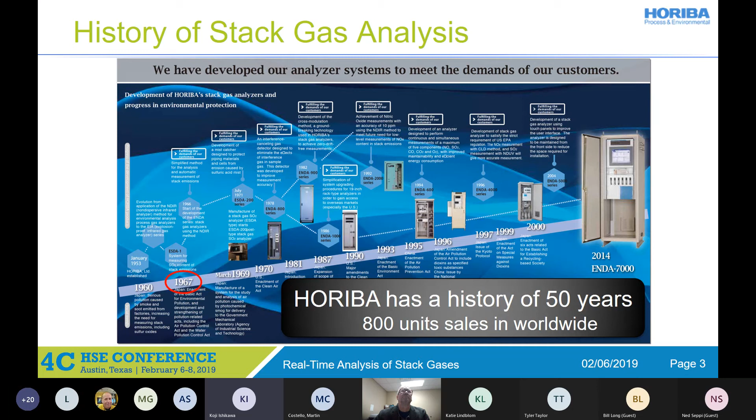Before I explain the technology, I'll introduce our history of stack gas analyzers. Horiba started to sell stack gas analyzers in 1967, so Horiba has a long history, almost 50 years. We have developed our analyzer systems to meet customer requirements. Currently, we ship almost 800 stack gas analyzer units per year worldwide.

Our stack gas analyzer type name is ENDA, E-N-D-A. The features of the ENDA series are online and real-time, long-term stability, and high sensitivity. From these features, we provide it as a continuous emission monitoring system, CEMS, to customers. Main applications are electrical power plants and waste incinerators, for monitoring the concentration of exhaust gas to ambient, and for controlling plant burning and reagent injection.

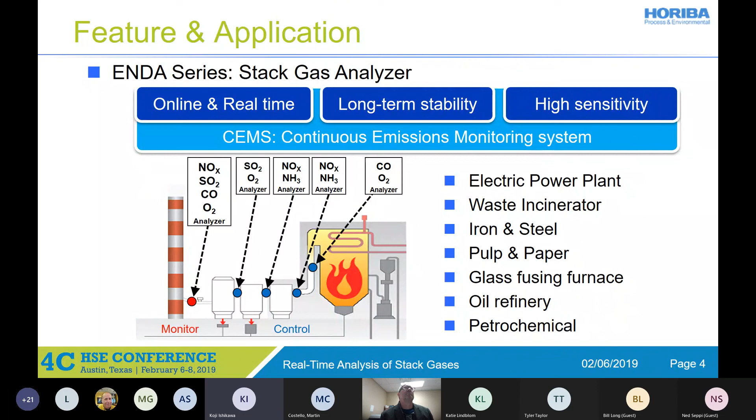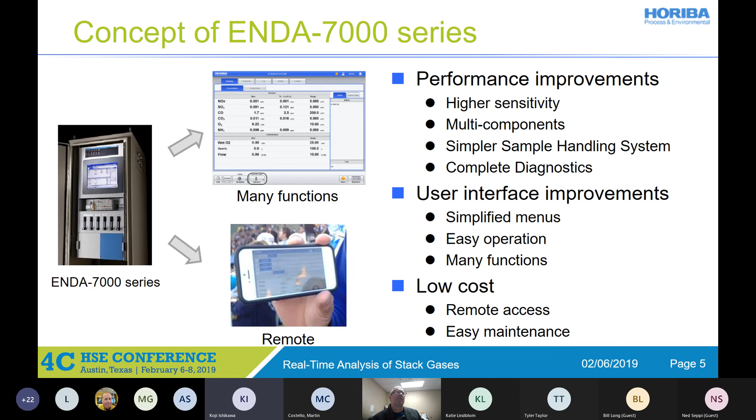This slide explains the product concept of the ENDA-7000. The 7000 series is the latest product for the US market. The first concept is performance improvement; I will explain in detail later. The second one is user interface improvement. The 7000 has a big 15-inch screen and simplified menus. And it can be remote controlled. You can check the status and operate remotely, using a phone or tablet.

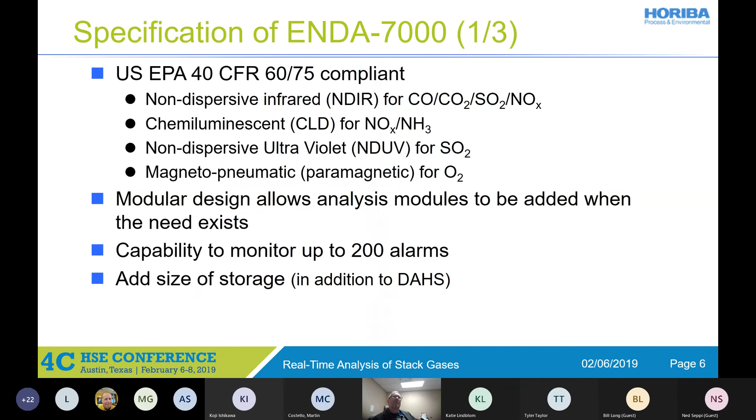In the next 3 slides, I will explain the 7000 specifications. This first page is the functional specification: the 7000 is US EPA 40 CFR Part 60 and 75 compliant, and analyzer modules can be added when the customer needs them. This slide shows the performance specification. The 7000 can measure a 5 ppm range at minimum, and a total of 6 components in one case.

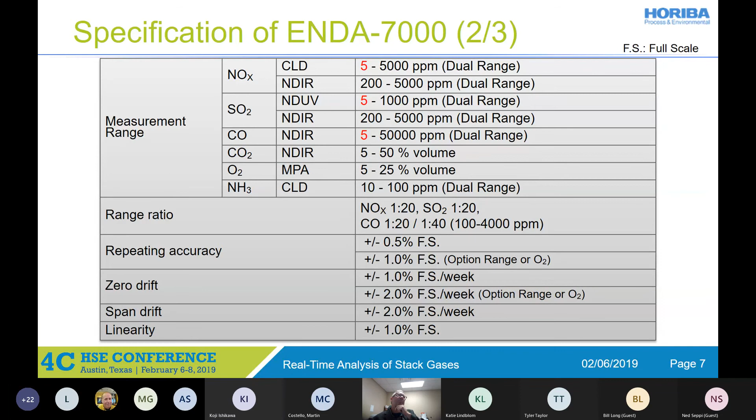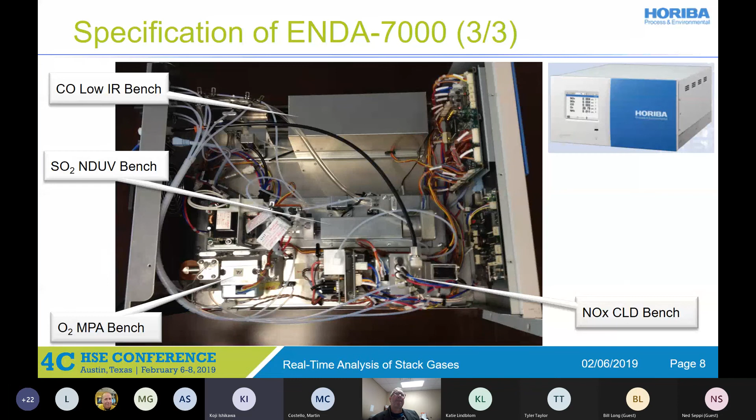This picture is the inside of the 19-inch rack analyzer. Each bench is designed in a compact size. We can make many combinations depending on customer requirements. It's easy to change and easy to combine.

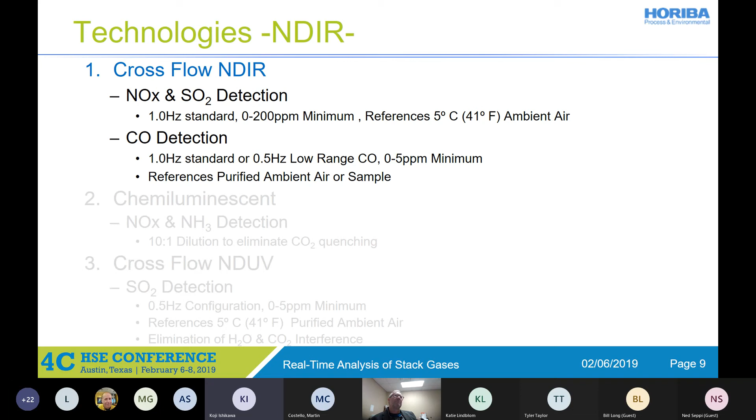From this slide, I will explain our 3 technologies. The first technology is cross-flow NDIR modulation. Its measurement components are NOx, SO2, and CO. Generally, in non-dispersive infrared, called NDIR, many components have a specific absorption spectrum in the infrared. And absorption intensity depends on concentration. So NDIR can measure the concentration from this spectrum and intensity. That is generally speaking.

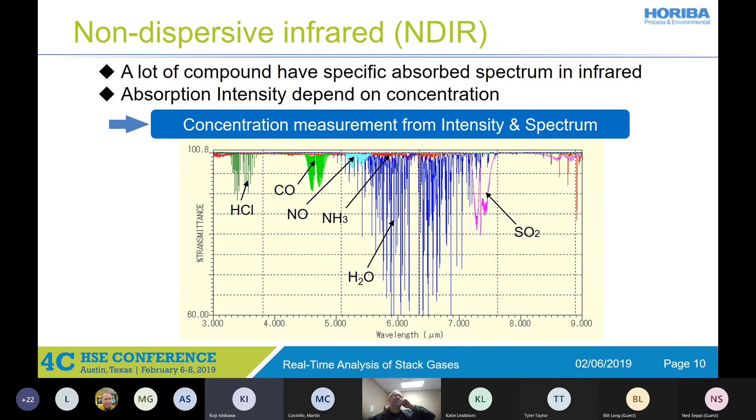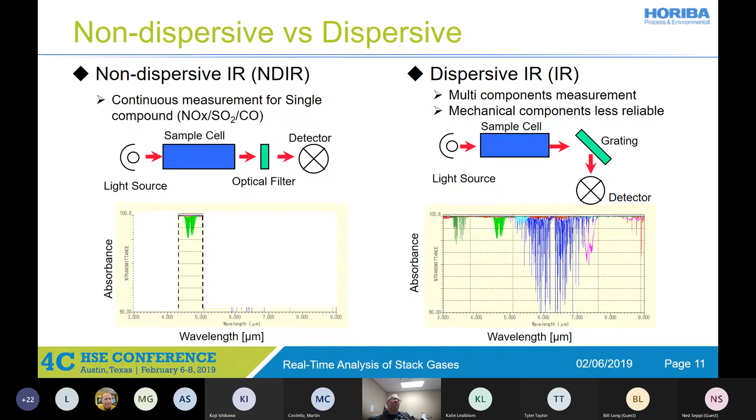Using NDIR, our featured technology is cross-flow modulation. The analyzer configuration is one light source, one measurement cell, a detector and a solenoid valve. The principle is switching the sample gas and the reference gas at 1 Hz. Then the IR signal is the difference of the IR absorption between sample and reference. The signal is just the absorption difference.

If we change the light source and detector, the base zero is stable. So it's not necessary to adjust the optical parts, the filter, or the light source. It's not necessary. And clean reference gas is injected into the sample cell every 1 second, so the cell is always kept clean. This is suitable to measure stack gas continuously.

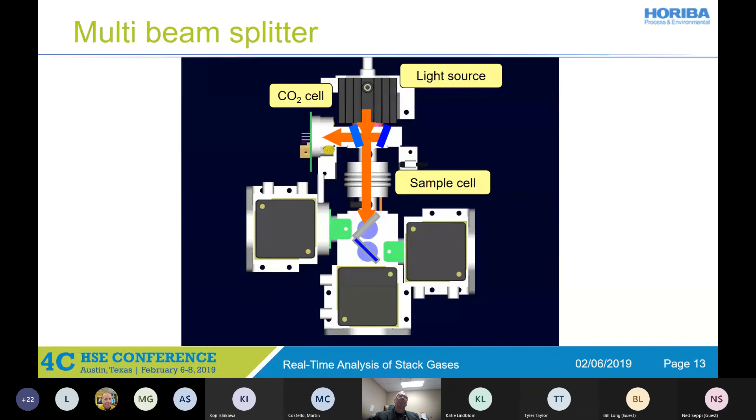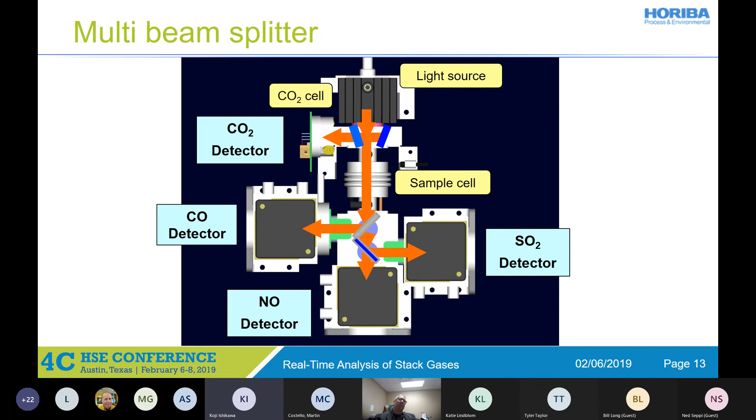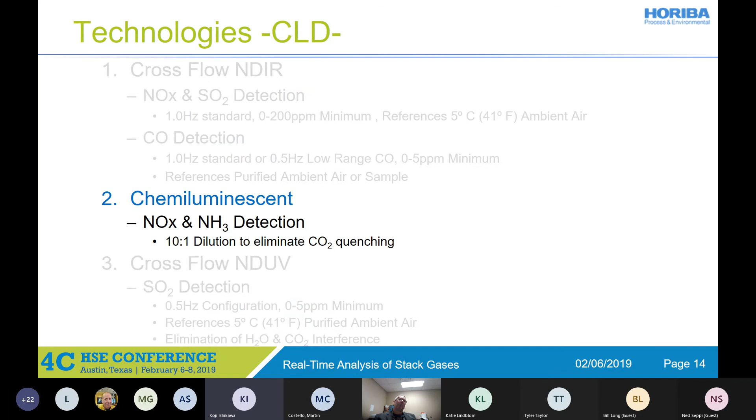Okay, the next, second technology is chemiluminescence. Measurement components are NOx and ammonia. First, I'll explain the principle. Nitric oxide, NO, reacts with ozone gas, then nitric oxide is oxidized and nitrogen dioxide is generated. A part of the generated nitrogen dioxide becomes excited. When nitrogen dioxide changes from the excited state to the ground state, it becomes luminous like this figure. This emission intensity is proportional to the nitric oxide concentration in the sample gas. So the detector measures the intensity to calculate the nitric oxide concentration.

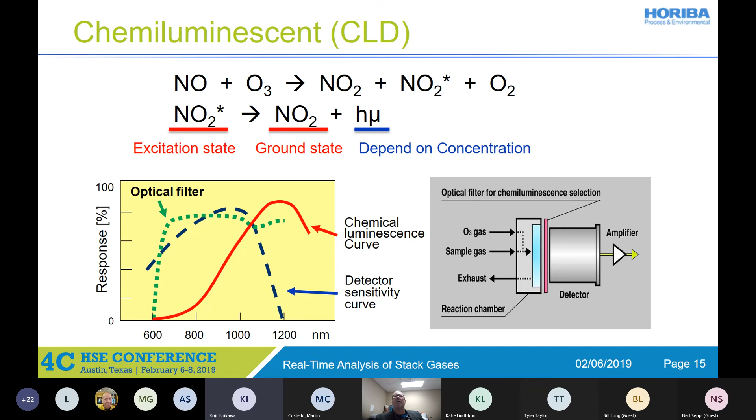This is the analyzer configuration. Our CLD analyzer's minimum measurement range is 5 ppm. We are using a vacuum pump. It's always kept at minus 9.8 kilopascal, almost 10 kilopascal. And we adjust the flow rate at every line: sample line, dilution line, and ozone line. The total flow rate is almost 1 liter per minute.

In burning exhaust gas, CO2 concentration is high and changes depending on the burning condition. CO2 has an effect of quenching the emission, so the emission intensity is reduced. So our analyzer has a dilution system with dry air, reducing the CO2 quenching. That means our CLD analyzer is stable with no interference in all gas conditions.

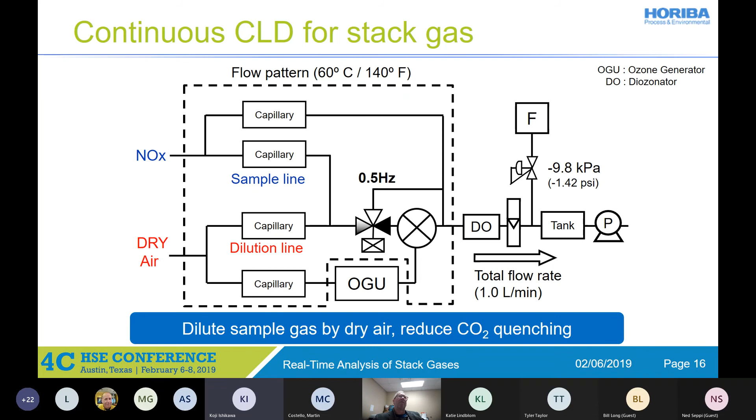And using a single CLD analyzer and sampling unit, we can measure NOx and ammonia. After the sample gas goes through the primary filter, it divides into the NOx line and ammonia line. Only the ammonia line has an oxidation catalyst. Ammonia is oxidized to NO, nitric oxide. After that, the solenoid valve in front of the analyzer switches the NOx line and ammonia line. The difference of the NOx concentration is the ammonia concentration, calculated in software continuously. That's the measurement of ammonia.

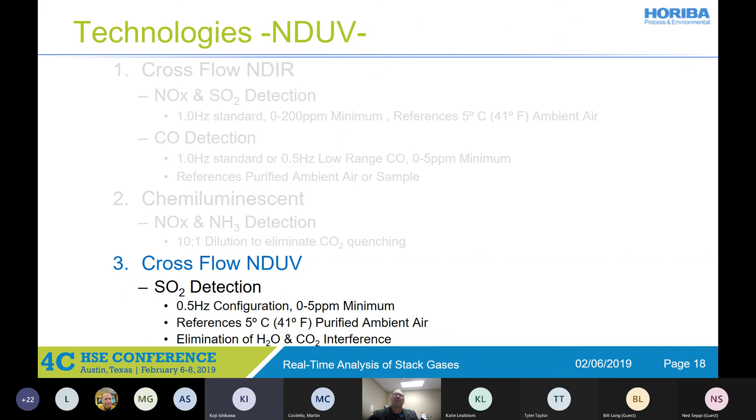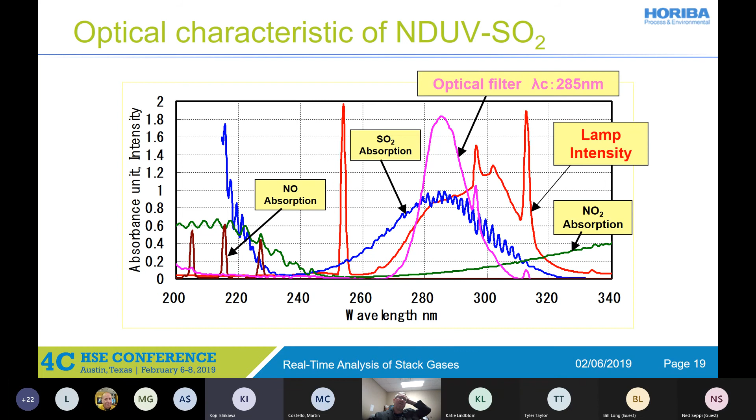The next technology is cross-flow NDUV modulation. The measurement component is SO2. First, I'll explain the optical characteristic. The light source is a special mercury lamp, in red, and the optical filter is in pink. It has a center wavelength of 285 nanometers. At this wavelength, NO2 also has absorption, shown in green. When the sample gas has a high concentration of NO2, we add a NOx converter in the sampling system in order to convert it to NO.

This is the NDUV analyzer configuration. This analyzer can measure SO2. The minimum measurement range is 5 ppm. The NDUV analyzer also has the cross-flow method I explained on the NDIR page. It's the same principle, switching sample gas and reference gas by solenoid valve. And in order to reduce the effect of water, a PPD tube is placed in front of the cell. Its purpose is to reduce the effect of water.

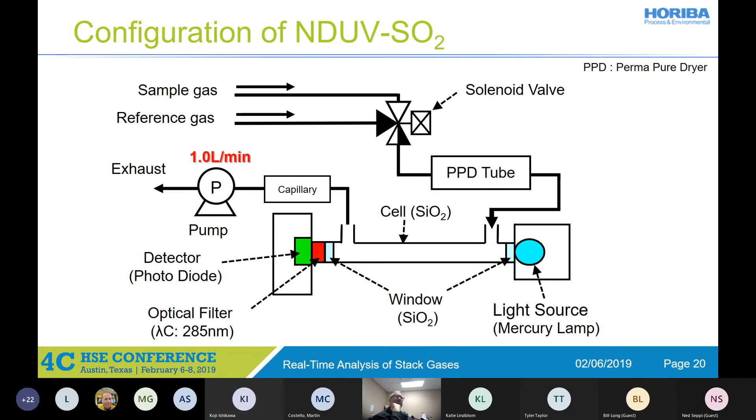Okay, in the next slide, I show the performance results for stack gas. For a stack gas analyzer it is important to measure continuously. The keywords are stability and sensitivity. About stability, our technology has cross-flow modulation, which I already explained. Next, a low sample flow rate, which improves the sample components life. And we make every key part in our own facility, our factory. HORIBA Japan makes all key parts.

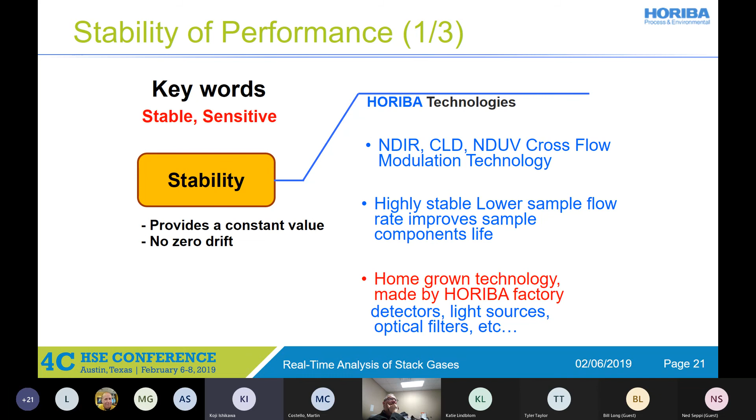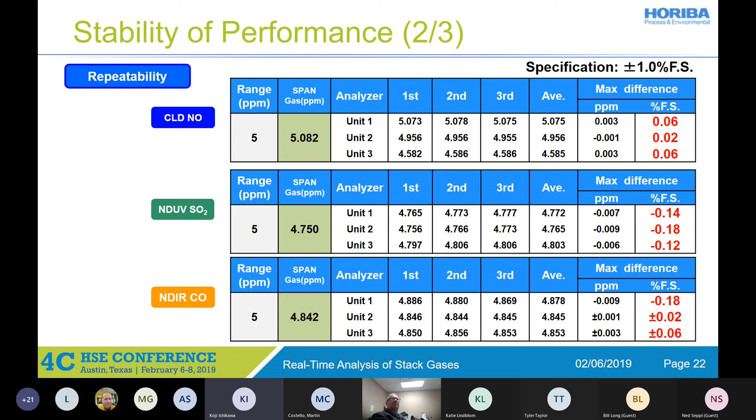This table shows the repeatability results. Every analyzer has a performance within plus or minus 0.2% full scale for NOx, SO2, and CO. The measurement range is 5 ppm for each. And this is the zero drift result, showing the weekly drift. The average of 3 units for CLD, bottom left, is plus or minus 0.7% full scale. NDUV, upper right, is plus or minus 0.3% full scale. CO is plus or minus 0.2% full scale. So every analyzer showed good stability results.

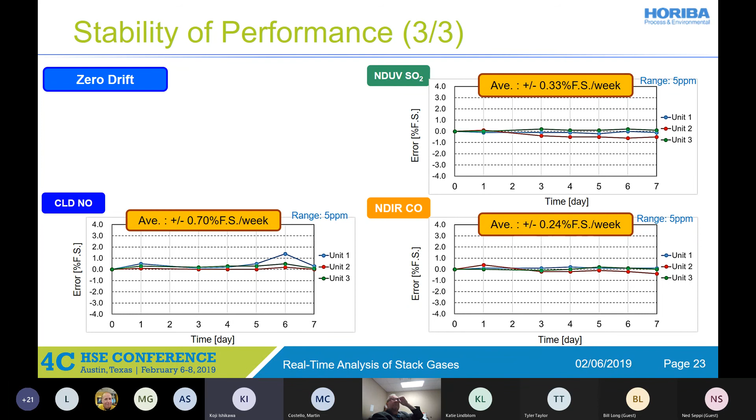So next keyword, what is the sensitivity? So that is the same as ambient analyzer in stack gas measurement. We modify ambient monitoring technology and eliminate interference effect to achieve the sensitivity.

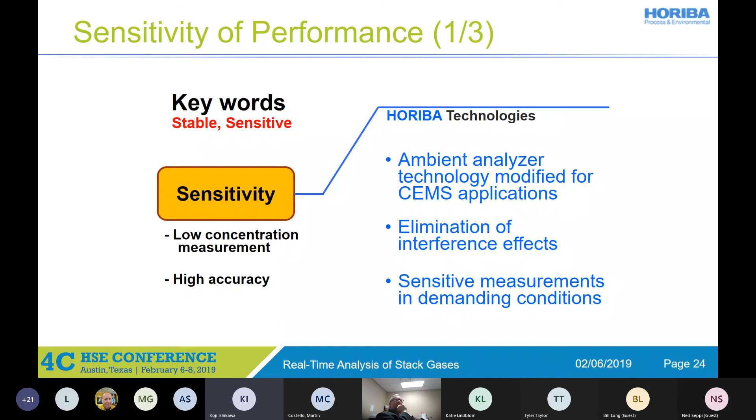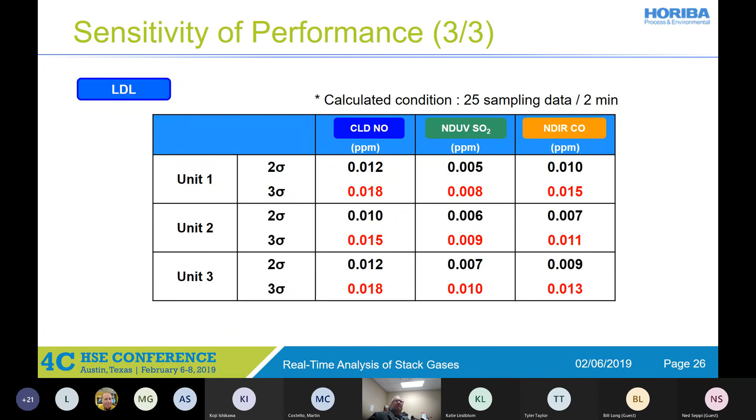So, okay, this is my conclusion. Our stack gas analyzer has high performance and is user-friendly for operation, with many functions for stack gas. We are still improving ongoing technology for real-time analysis.

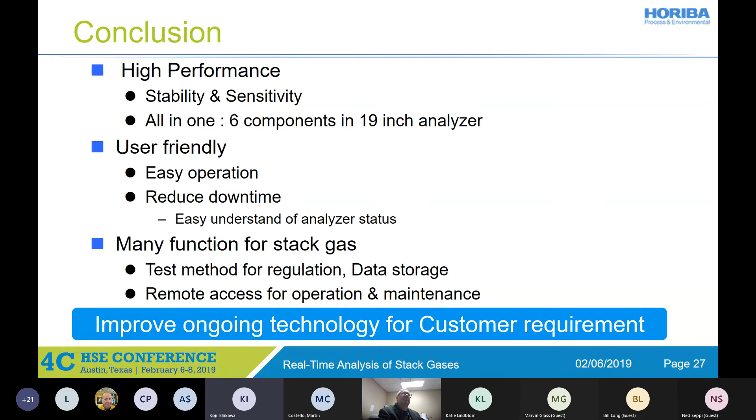Okay, that is my presentation. Thank you for listening. That's it.

Steve, do you want to unmute? Yes, thank you. Sorry, Todd, I was asking the question, but I was muted.

Koji, there's a question about real-time analysis of stack gases. Are there any benefits to bringing real-time gas composition into a DCS?

Koji, are you muted now? Oh, yes, sorry. Yeah, so our benefit is real-time measurement for the DCS, right?

Yes, and does HORIBA have its own DAS that's associated with this, or do you partner with other companies that have data acquisition systems? We have a partnership with another company.